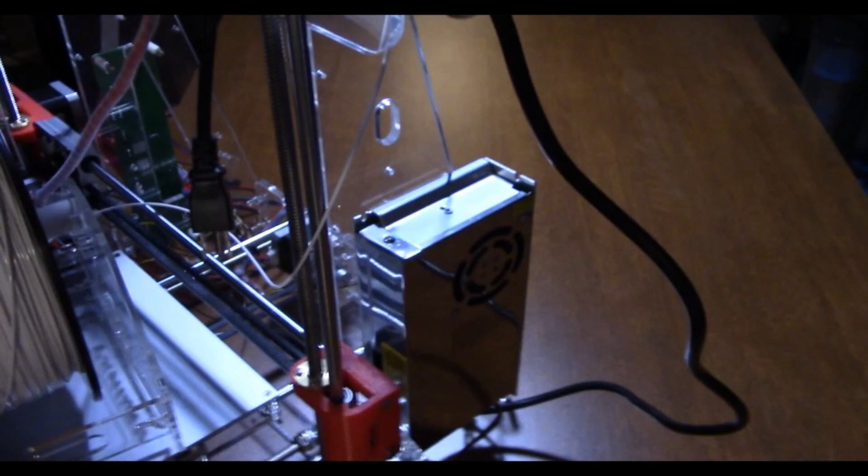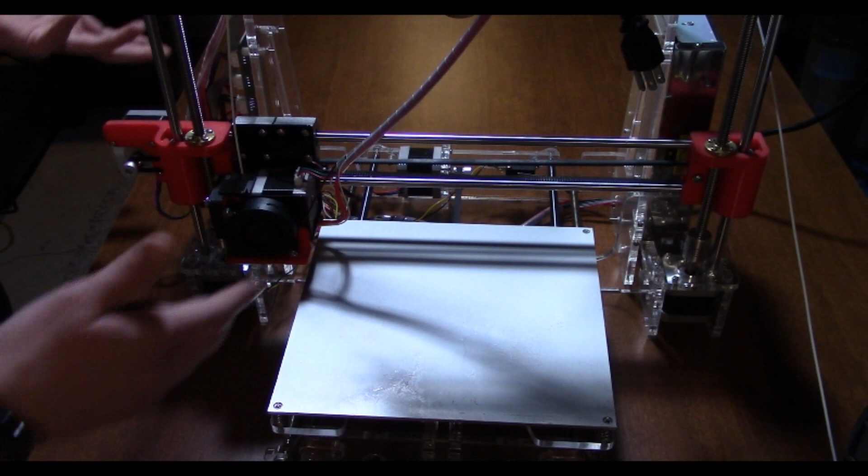At this point you're probably wondering why we didn't see a build video or build time-lapse. Not to make up excuses, but my camera wasn't recording - I had the wrong settings, so I'm sorry but that footage isn't going to happen. So I'm just going to go through and give you guys tips on how to build it, and go through a lot of what I figured out as I was building it.

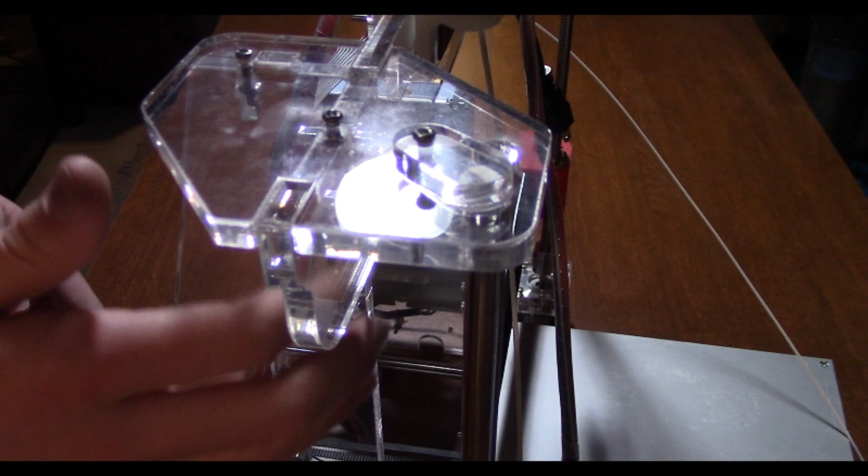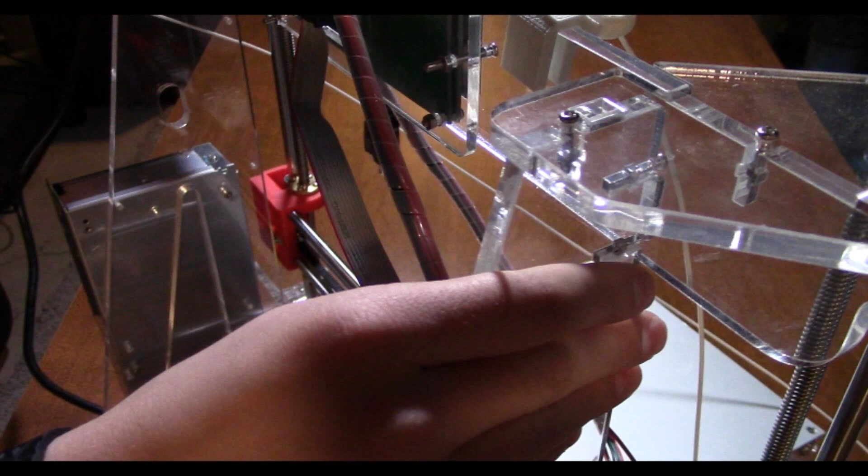To start off, there's the screws you use to basically put it all together. You have the acrylic pieces that you're combining, and you're trying to screw them together. You have a screw and a nut, and the nut just fits right into the plastic, slides right in. You can see down here there's a nut that slips into the plastic, and then you push this in - so the acrylic holds the screw, and you just screw it in. That's basically how that works.

It's pretty simple. I did find that it wasn't just a video with instructions - there were also written instructions as well. I didn't take a look at that, so that's my fault, but make sure you guys check that out, because that makes it a lot easier than trying to watch the video - I had to consult YouTube, and it was interesting.

A lot of the wiring is a little tricky, so make sure as soon as you connect the wiring to your Z-axis motor - these two motors at the bottom, back here - remember that Z-axis is the up and down movement. Y is the plate moving back and forth. And X is the extruder moving. That's something really important to remember.

When you're wiring your motors and other electronics like switches and the menu board, the LCD display up here, it's important to tape labels on and say this is the X-axis motor, this is the Z-axis motors, this is the Y motor, this is the X motor, this is the X switch, Y switch, Z switch.

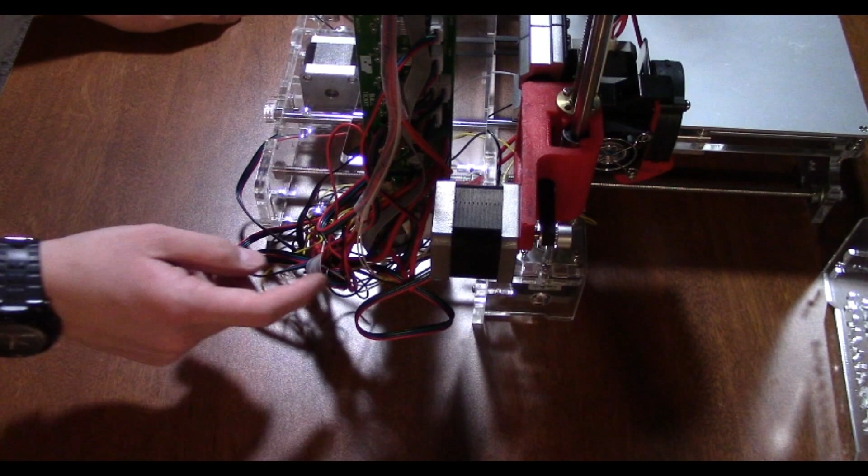But you also have these interesting screws in this mumble jumble, these things right here, these little green things in back. You just take the 2 wires, like you'll have 2 open wires from the heat bed or the extruder heater, and the power source in the back here. You'll have 2 of those wires, and you just have to hook it up. The heat bed and extruder nozzle don't need to be in a specific order. It says positive and negative, but you just put them both in, and because they're both red, that works either way. Or at least I got it right the first time.

So that's something to keep in mind when you're putting the power station together. Let's see if I can tilt this up for you. This is the configuration of wires that you're going to want.

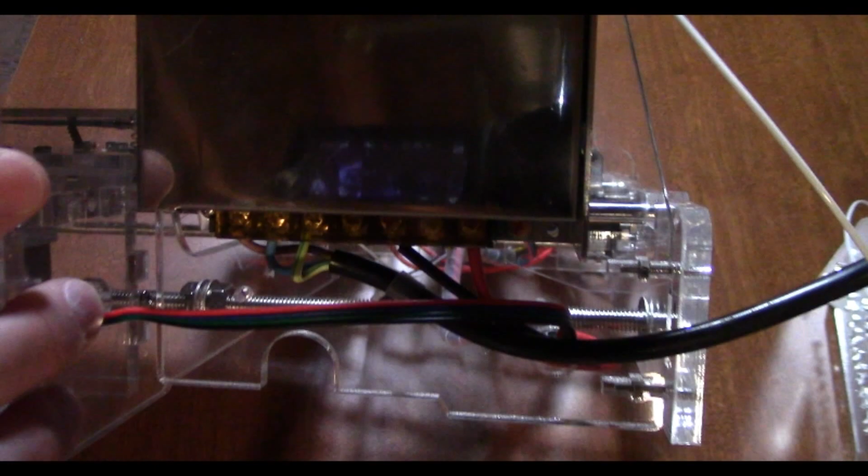See it right there. It's kind of challenging to see for me at least, these wires were actually different than the wires in the instructions. So I ended up just following a YouTube video, and they had the right wiring. You have the brown wire for the L, blue wire for the N, and yellow and green for, I'm not exactly sure what symbol this is, but from left to right, looking at the bottom of it, you have brown, blue, then yellow, green. So I'm just hoping you guys can see that there.

So that's mainly all the challenging parts. When you're putting the heating bed on, you're gonna want to watch out for these wires in the back, because I've had to solder those on a couple times, the heated bed wires. So when I put the wires on, I directed them back and around the back spring screw here, so that they'd be pulled out of the way.

They have them soldered, I believe, this way. I turned it to solder this way because they were hitting the motor and getting broken off. They just broke off, so that was something I had to adjust. Your switches, you want to make sure are in the correct positions. They're not too challenging to install.

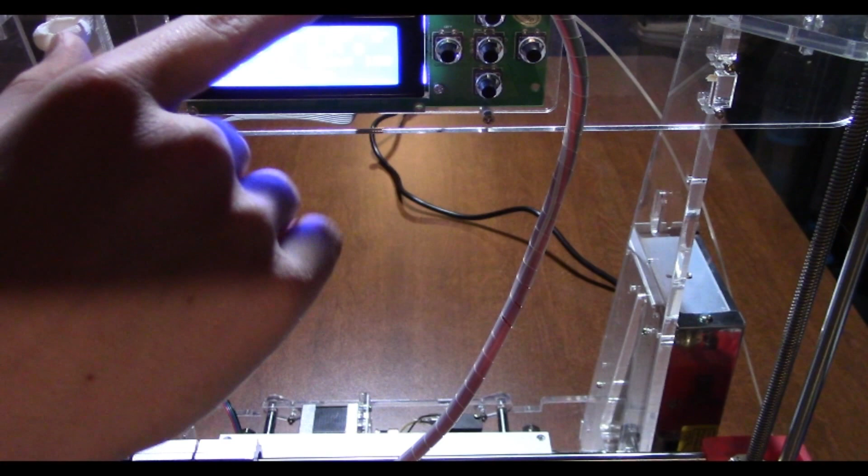One thing to notice for later is, I don't know if you guys can see it, but it said P802m 1.6 or so. That was one of the problems I was having with the software, so I'll get to that in a little bit. But since this is about leveling, I just want to give you a quick run through of that.

So the basic instructions: as soon as you turn it on, you're gonna hit the middle button, which is the quick menu. You might have to hit it once or twice because it's not that responsive. So you have this back arrow, this select arrow, and this scrolling for top and bottom. So middle is quick menu.

This is just going to be a little bit for you guys to go through and kind of figure it out for yourself. So I'm going to try to provide you with the information, but I'm not going to go through every single thing because I haven't personally figured out everything in here.

Going through it though, you want to scroll down to position, and you're going to go to home all. That's going to move everything, the Z-axis, the Y-axis, and the X-axis. And that's going to allow it to make sure everything is in the home position where it'll start.

So, just going to go back out of that, hit the left arrow, scroll down till I go to configuration. Down at configuration, going to scroll down all the way again.

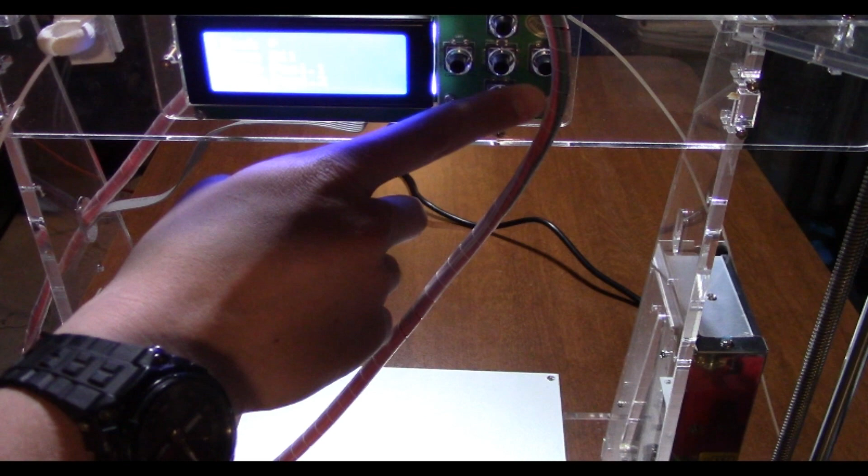So once you go to leveling auxiliary, it's going to bring up home all. Go to position 1, go to position 2, go to position 3, go to position 4, and then Z position. So this is going to level each of these.

So this is go to position 1. It's going to be in this corner right here. So press that, or select. So that just moved it there.

So now what you're going to want to do is, once you have your screws in each of the 4 corners and the wing nuts, you're going to want to loosen and tighten each of the corners so that you have a little bit of resistance on the card between the nozzle and the bed. That will allow you to keep the bed pretty level, or fairly level. I believe there's an auto leveling upgrade that you can buy, but I'm not going to get into that right now because I think you have to install a bunch of firmware.

Go to position 2, same thing. Go to position 3.

Go to position 4. You're going to want to make sure you have some sort of ruler or caliper for making sure the X-axis is level, but the Z-axis motors are leveled. You want to make sure the distance from the table to the bottom or top of this red piece is the same as the top and bottom of the other red piece over here, because that'll make sure it's not at a weird angle, which gives a lot better prints.

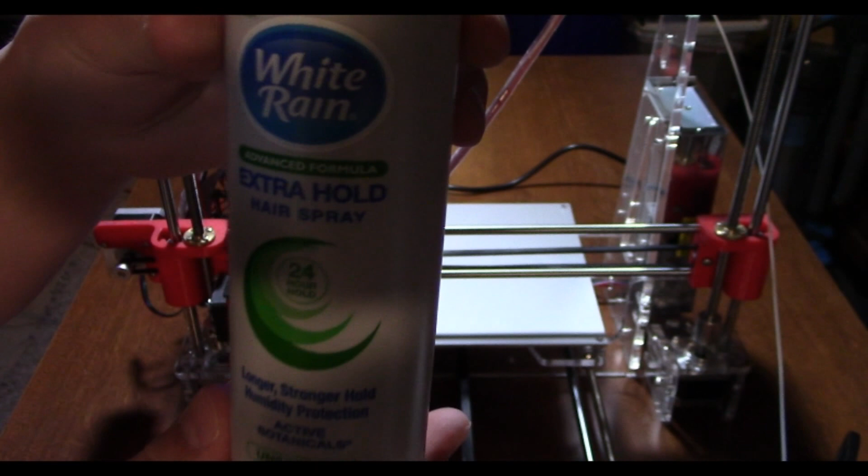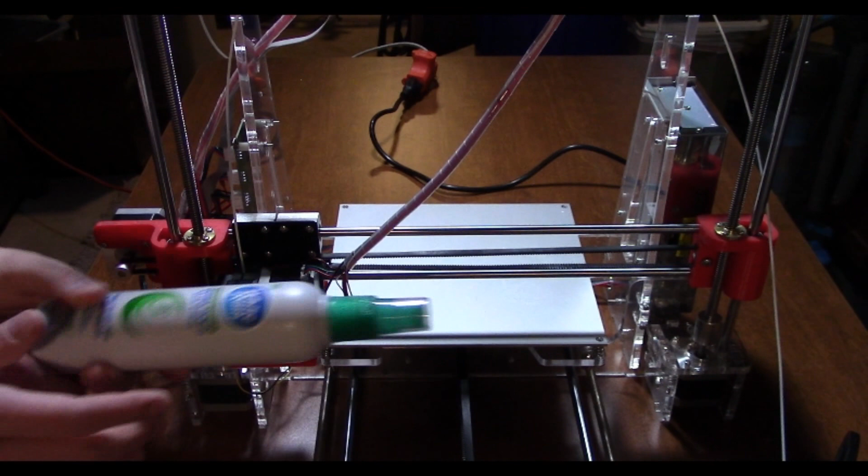Instead of using ABS liquid or glue, you could also use hairspray. I use unscented hairspray, it works the best for me. You can clean it off with a little isopropyl alcohol - it takes a bit to get off, but so does the glue stick. Painter's tape is the easiest to remove but hasn't worked too well for me. I'm going to keep experimenting and let you guys know if anything changes, but I think I'll stick with this unscented hairspray - extra hold. This stuff kind of smells like hand sanitizer, so it's slightly scented even though it says unscented. Got this from Walmart, pretty cheap.

Getting into printing, I'll show you guys some print quality here. This is actually a piece I printed - I'll put a link for this in the description too. It clips onto the top and directs the filament so you can keep it on the spool, like this Tronxy spool, and have it directed without messing up your filament as much.

Also, another couple things just to show you the quality of prints. The quality of the prints have gone way up, since if you're leveling everything nicely, and all the belts are tightened, your quality of prints will go way up. So that's one thing you really want to make sure you're watching out for.

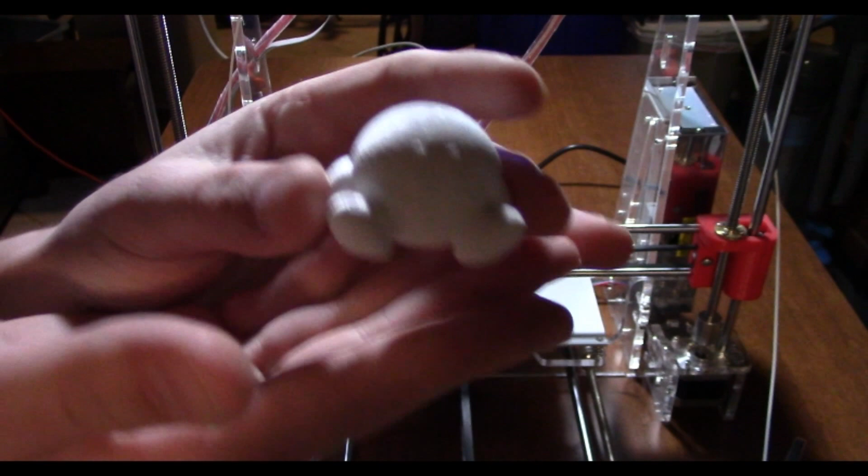This is Kirby. Don't know how well you can see him, but the quality of the print on him is really, really nice. I mean, I could go a little bit nicer, but... and this is another thing.

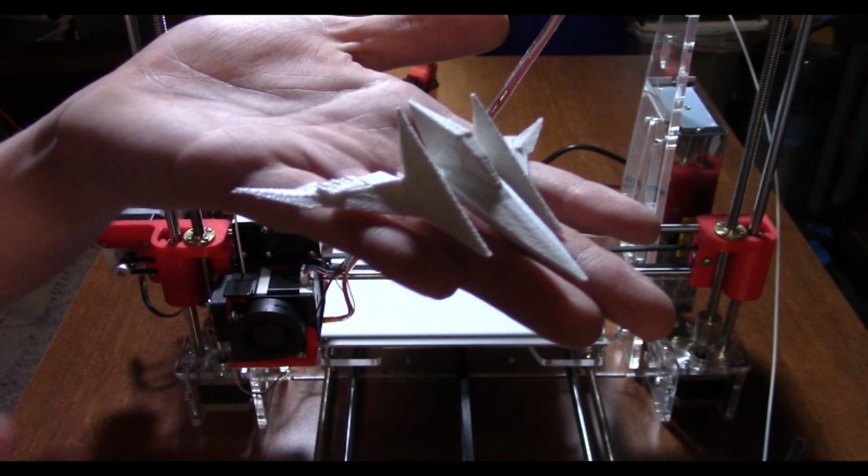I've been printing these for my friends and stuff, because they're into games and stuff, I guess you could call them gamers. This is an Arwing, so this is actually one of the more complicated prints I've done.

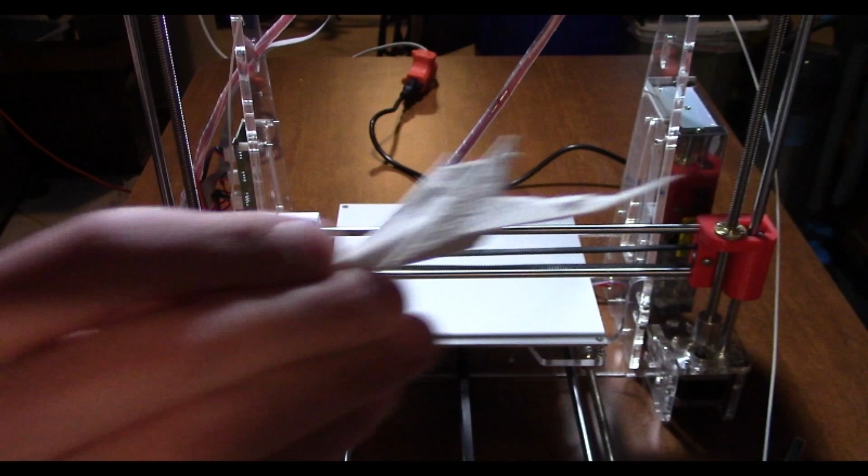So I just put supports in the Repetier software. Actually, it puts it in for me as long as I select it. So basically, all you have to do is just import the file, size it down and everything, and it should put supports in for you if you have the correct thing.

But the printing here, I'm trying to show you, it's a little bit messy underneath because that's where the supports were. I'd recommend using some sort of shop knife blade or something, being very careful not to scrape up the aluminum bed. But if you get some sort of tool that'll allow you to scrape underneath the prints, that would be really helpful, because this works, but it glues them down.

So if you use too much, it will be impossible to get off, and I've already dented up my bed in a few spots by using incorrect tools. So you want to make sure you have something like that.

So just to show you, see if I can get you guys the print quality on this. It's not bad, but again, this is a $150 printer, so don't expect amazing, but you can expect fairly decent prints. You can also put this in acetone, or an acetone bath, which I'll explain in a little bit, for making your prints better.

Alright guys, so I'm just gonna basically take you through the process of downloading a file. And if you don't need to download a file and you already have your file, you could skip ahead a little bit, and I'll show you how to use the Repetier software. But for those of you that don't know how, I'm just going to go to the open source website called Thingiverse.

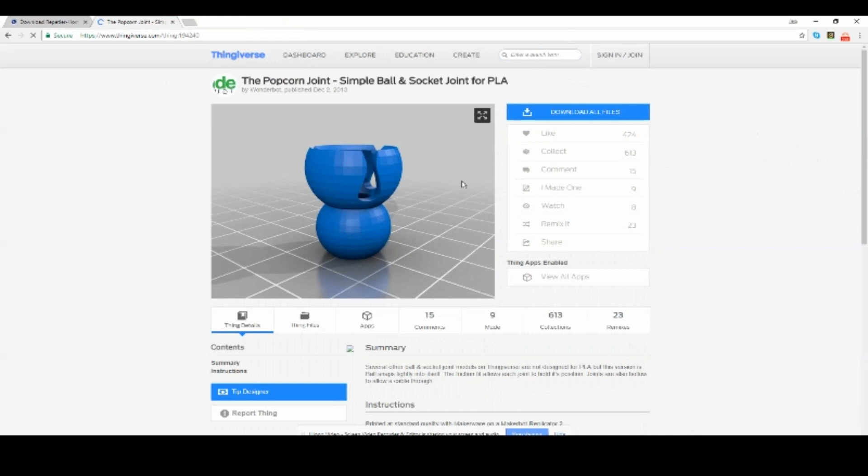I'm going to download it. Once I have my files downloaded—actually, in order to download your files, you can either download all files, or if you want specific files, you can click thing files here, then click on ball socket, or whatever the name is, and it'll download it. So it's pretty simple, pretty easy to understand. If you click on Thingiview, you can look at it three-dimensional. Once you guys have your files downloaded, I'll show you how to use it for free.

Okay guys, so when you have your CAD software, specifically Design Spark Mechanical, this is the one I'm going to use. This is just a quick tutorial. I'll have a link down in the description so you guys can use this or download it. But once you have it open, you can edit it, and if you don't want to see this, you can just skip ahead to the Repetier software.

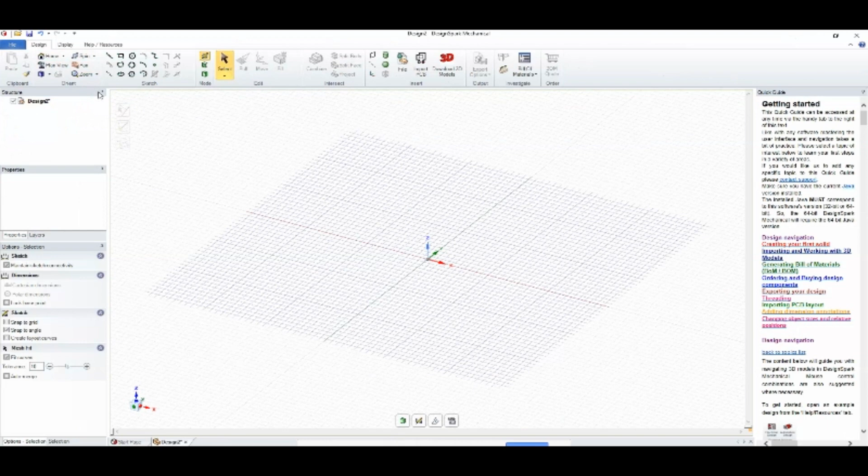Spin is like an orbit button, similar to the orbit button on Fusion 360. The pan moves it around basically, and the zoom zooms in and out.

So you can draw with a line, a square, circle. There's a 3-point circle, 3-point rectangle, dotted lines, and ovals - or sorry, this is an ellipse. I don't use those as much, but I'm sure those would be really helpful for building more intricate drawings and items.

So to start off, I'm just going to basically build a square with a tube running through it. Honestly, just because I don't have anything I need to build right now, it's just the thing I need to print. So you can set your dimensions, click on it, and say we want to set it to a square of 10 millimeters by 10 millimeters.

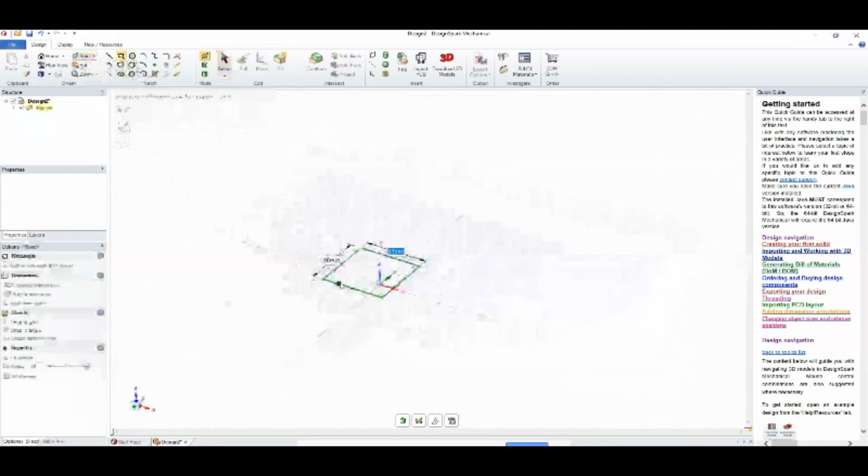So for some reason, I haven't seen a way, once you fix the drawing here, to actually go back and adjust it again. I know you can move and pull and everything, but I haven't seen a way to go back and actually adjust the square size itself. I don't know if that's possible.

So once you have your square, I'm just going to put a circle in the middle, and this is just going to pull it out. I'm going to say 5 millimeters. So you can change the units, or you can change the measurements again, like I'd shown you before.

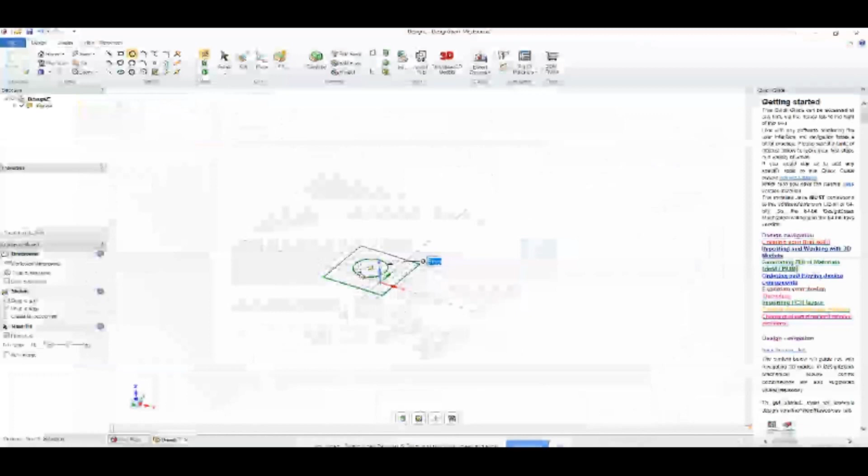This is a little bit annoying to me - it says snap to grid. I guess that would help, but I normally just like to leave the snap to grid off. I haven't done too much with angles, so I can't really give you an opinion on that, but that's probably going to be kind of annoying as well if you're trying to move things.

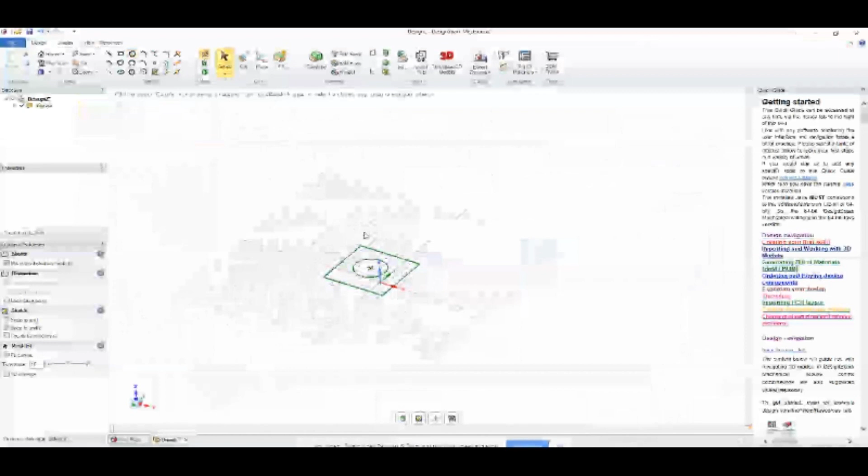So I would want to go back to the select button. I'm going to highlight the entire item, so everything is highlighted. Now I'm going to click on the pull button, wait for it to load, and now I'm going to click on the outside. I'm going to pull that up, and now there's a hole in the center of it. So that's pretty easy.

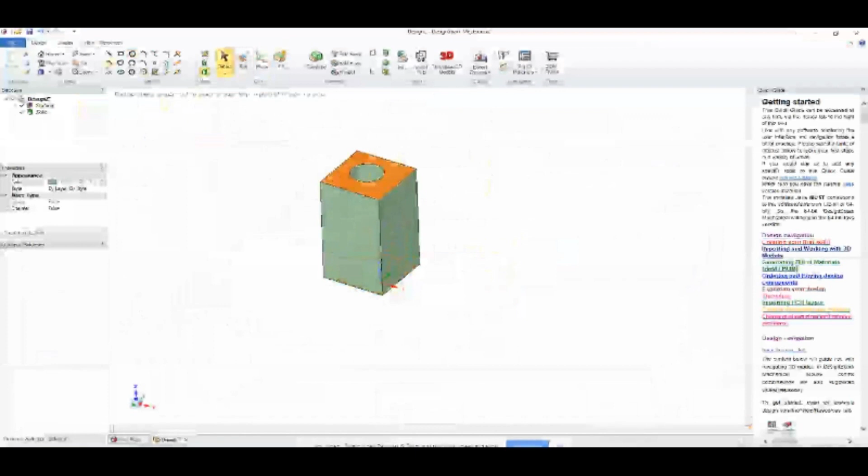Spin, and so you can see all the way through. What I've noticed is if you have, say, a square built off to the side here, I believe my printer did end up printing - sorry, this is supposed to be next to it - but I believe it will end up printing a very thin layer of filament, so you want to make sure you have your object moved.

So to move it, you can just go to select, highlight everything, then move, and now you can move your object. Now if you just want to move a line, you just select the line that you want to move. Here's how to move the angles.

Again, you can adjust the distance that you're moving it and the angles. You can move the actual arrow or keys that allow you to move it, and that's a pretty basic introduction. Again, if you need more help with getting started, there's this getting started guide over here that'll definitely help you.

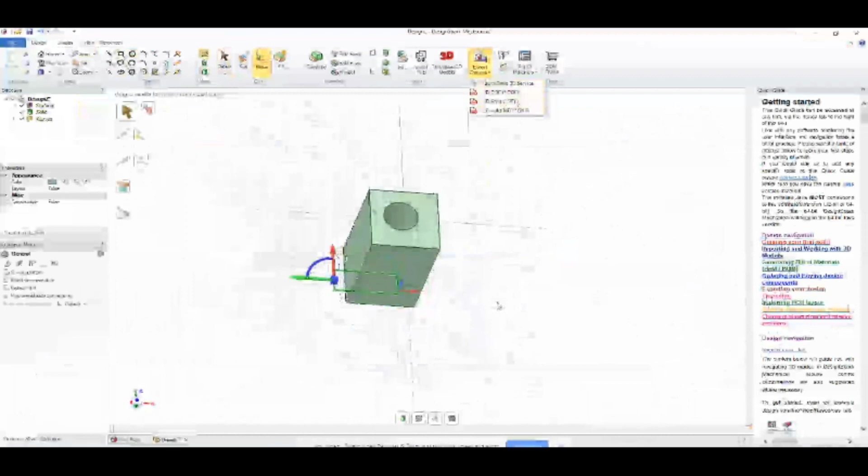When you're ready to export, you go to export options, and export it as whatever you need - PDF, STL. I normally would export it as an STL because that's what the Repetier software deals with best. I haven't experimented too much with the object files, but nonetheless, let's get into the Repetier software.

So I'm going to leave this here. I could save it, but I'm going to leave it here right now. Actually, just to give you guys a good idea of what's going on, I'm going to export this object as STL.

I'm going to go to Downloads, and I'm just going to call it Design 2, because that's what it is. Make sure you have your STL files selected. Now, I'm going to actually call it Design 3, because apparently I have something already saved as Design 2.

I'm going to go into the Repetier software. You want to make sure you download, if you have the same printer as me, version 1.6, because the version that the printer came with was version 1.6.2, and that didn't work with my printer. It might work with yours, but it doesn't seem to work with mine. I think I have to update the firmware on the printer first. So I will leave a link where you can download version 1.6.0.

I still cannot get it to connect to the printer though.

So here's your orbit, your moving viewpoint, and the moving of the object, zooming in and out, and zooming objects to fit. And this is to pick the side that you want to look at.

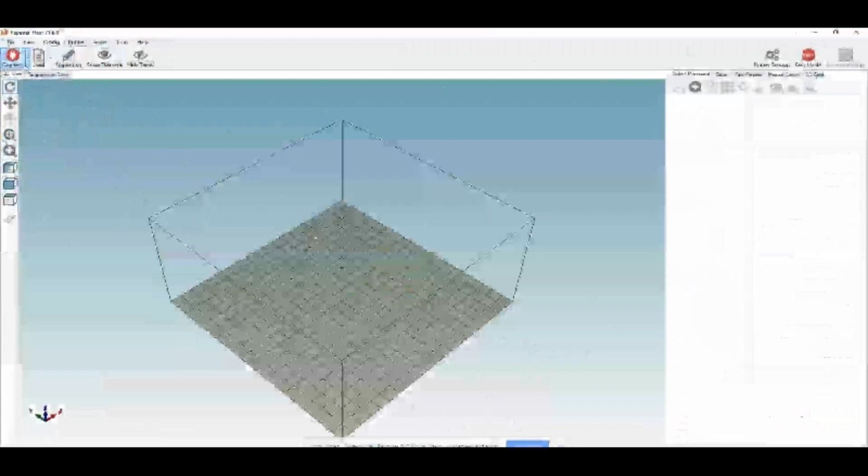So I'm going to go to load. I believe you can only load one at a time. So I'm going to go to Design 3.

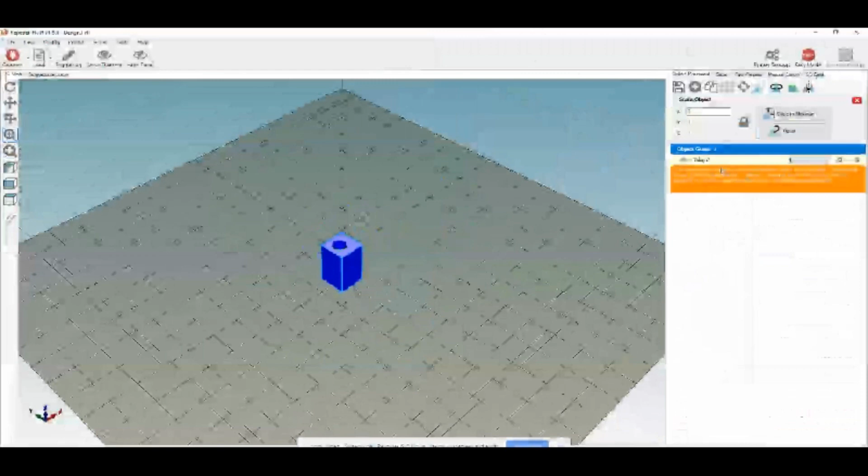So this guy's pretty small, I'm going to scale him up. Click on Scale Object over here. Make sure you have the object that you want highlighted - it'll have the name, and it's called Object Group 1. If I have multiple objects in here, it'd just be Object Group 2, Object Group 3, and so on. So I'm going to scale it up by 3 times right now. So that's a little bit bigger.

And then you can rotate it. Say I want to rotate it on the Y by 90 degrees, so I flip it that way so that it's not building as high. Not that it matters with really square, but yeah, that's basically how you rotate it. You can lay it flat, reset rotation, mirror the object, and view the cross section. I haven't experimented too much with those, but feel free to mess around with them.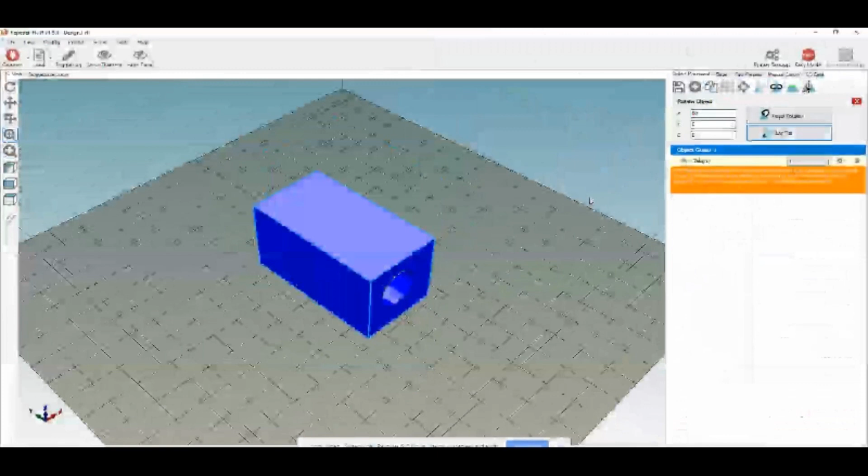So in order to get this into the operable file that the printer prints off of, you're going to want to go to the slicer, which will turn whatever file you have here into a G-code file. So basically...

I'm using Cura Engine, and Cura Engine has been working for me. So I go into configuration because I want to make sure all of the settings and everything are right. So I use 2 filaments, PLA and ABS. As of right now, I use two different types of filaments. I have it set already, so I had to create my own - I have ABS, default, and PLA.

So for ABS, I just go in - there's the print temperature and the bed temperature. These are, I found, to be the best temperatures for ABS, and for PLA, I believe it's 196. I'm just kind of meeting in the middle for myself - so 200 degrees Celsius, 196, 190. That's in the approximate area.

But the bed temperature I found to be best, and I researched a little bit, was about 70 degrees Celsius. I'd do a little research of your own and try to get an idea of what different types of filament you're using and what might give you the best results. So it's really a matter of experimenting.

So if you adjust any of these settings in the print or filament, you're going to want to hit save, or the save as, which is how I was able to title these.

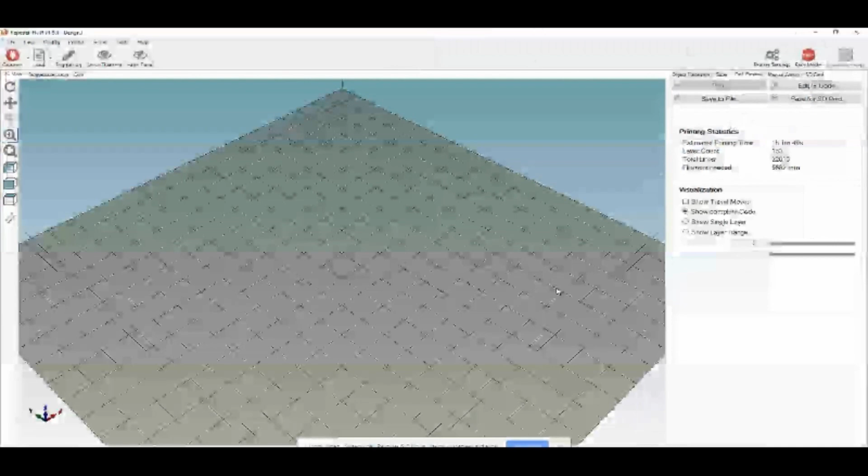So as soon as you're ready, you hit slice, and I believe there's also the Slic3r. So all this is going to do - for some reason it messed up the print a little bit. So that's something you're going to want to experiment with, I believe, because it had a hollow tube that messed it up. So something like this I would put in Meshmixer.

So it gives me approximate filament, total lines, layer count, and estimated printing time. So if you're going to save it to the SD card, if you can't hook it up directly to your computer, all you got to do is just hit save for SD print. You're going to choose where you want to save it, and then plug it into your printer and go into the quick menu and scroll down to SD card print file, and then scroll down to find your file.